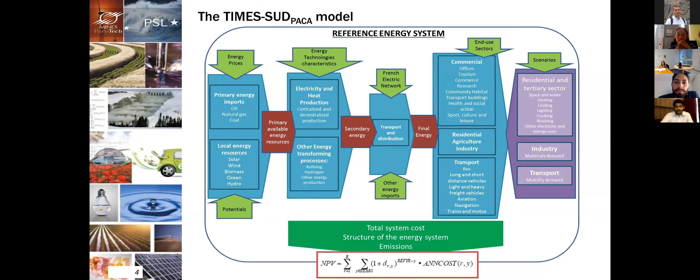And also the different energies that are going to be used during the period, the different transport distribution network, along with the demand side, and how they satisfy the final service energy demands. It's important to remark that in the model there is always an interconnection with the rest of France. So the region can use electricity that comes from France using the electric network and also using the gas network.

So here there is a brief detail of how I have introduced hydrogen to the model. So first, using electrolyzers, they use electricity to produce the hydrogen that, through delivery processes, is going to bring the hydrogen to the demand side. Also, it is possible to store this hydrogen and to blend it to introduce it to the gas network, which will bring gas and hydrogen to the demand side.

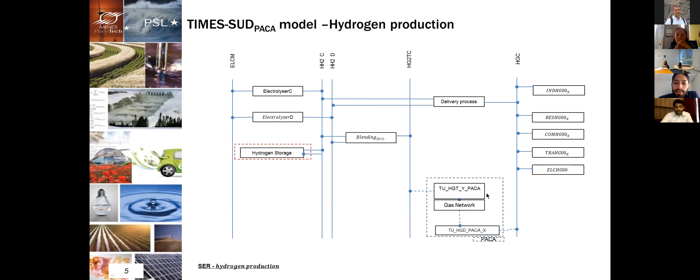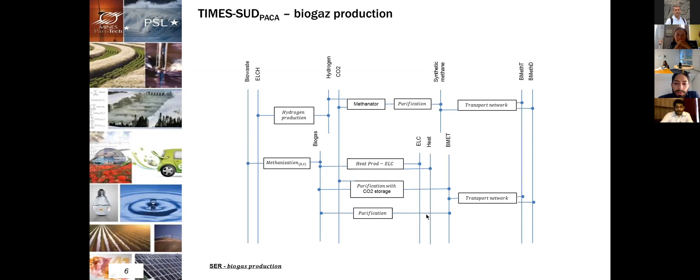Also, another power to gas technology that I have introduced is biogas production using hydrogen, and along with CO2, the methanator can produce synthetic methane that will be introduced into the transport network, and also the classic methanization processes that can produce biogas that can be used directly by heating and electricity-producing technologies, or through purification can be introduced into the gas transport network.

So today's analysis is going to be done through three different scenarios. The first is the reference scenario, where the energy system mainly follows past trends, and there are no new technologies allowed. Then there is the SRADDET scenario. The SRADDET is an official document from the region where they detail mainly the objectives concerned with how to cope with climate change, territorial development, and emission reduction.

So in this document, the region has detailed some of the production that they want to have in the period, especially in 2050. They want to reach a capacity of 65 gigawatts of production, and 75% of this capacity comes from intermittent resources. Okay, so in this document, the region also has targeted a 30% demand reduction. But for today's analysis, the three scenarios are going to follow a demand that follows past trends.

And finally, the third scenario is the new technology scenario, where I allow the model to use power to gas technologies and analyze how they can help the energy transition of the region.

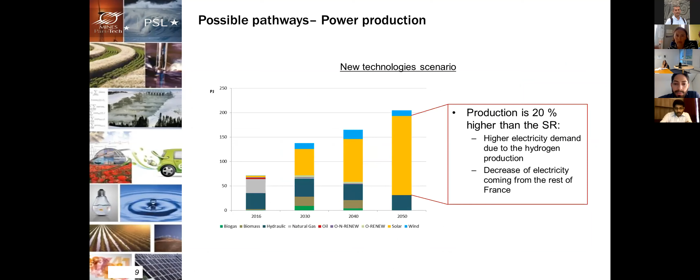So in terms of final energy consumption, we can see that in the three scenarios there is a huge increase in the use of electricity, but there is still also a huge use of fossil fuels. But the scenario that uses the least

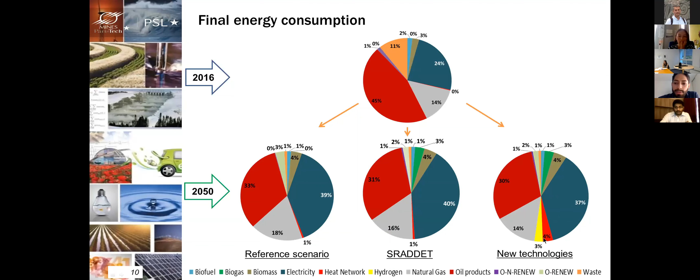fossil fuels is the new technology scenario, where hydrogen has helped to cover some of the steam demand in the industry and also to cover some of the heat demand in the habitat sector. Mainly, hydrogen was used to produce heat transported through the heat network. So in total, there is about 3% penetration of hydrogen in the new technology scenario. So in 2050, there has been a production of 20 petajoules.

68% of this hydrogen was used for habitat heating production, 31% for steam production in the chemical, food and beverage and other industries. And in transport, there was just a little use, 1% of this hydrogen.

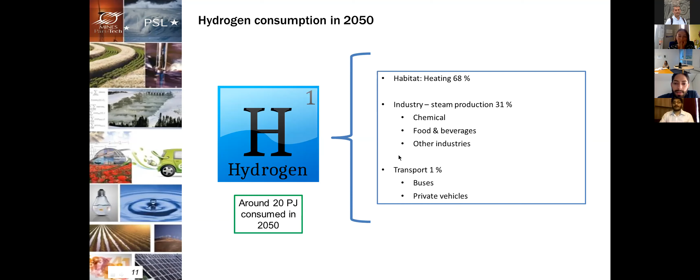The sector has shown to be one of the most difficult to decarbonize, so there are a lot of efforts and other analyses that have to be integrated into this sector.

As a conclusion, we can see that the region is on its path toward the reduction of fossil fuel consumption, as shown in the reference scenario, and also in the increased development of clean technologies. But...

Much effort is still needed, as in the SRADDET scenario, the region didn't reach the objectives established in the SRADDET.

It's interesting to see that power-to-gas technologies can have a key role in the development of clean technologies and can help in the decarbonization of the region, as we can see in the new technology scenario, it helped reduce some of the fossil fuel consumption. But further efforts are needed to apply in the transport sector.

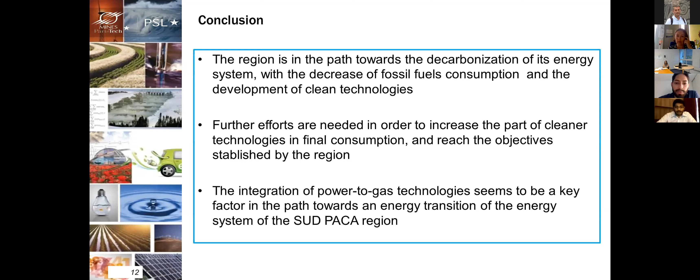Okay, a question from Dijen: how large is your assumed hydrogen mix in the natural gas network, if any?

Yeah, so I'm following the French statement, it's around, I think right now it's stated that 6% of the hydrogen can be introduced into gas networks. So I have to analyze if increasing this amount can change the use of hydrogen. So it's about 6% right now.

Another question: is wind energy not considered for modeling, or is it not selected by the tool? So wind technologies are an option to be developed, but there is not a huge acceptance from the people here in France.

So there is no social acceptance, and also there is a high bureaucratic procedure to allow the installation of these wind resources. That's why there is not much wind production.

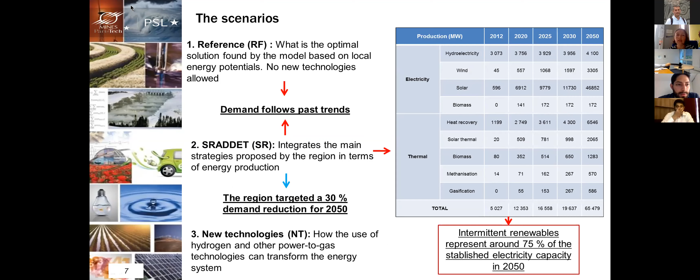It's in the chat. Yeah, I want to see the chat. Can you repeat the question, please?

Yes, did you consider a potential increase in hydrogen demand to produce jet fuels, following the industry strategy for a 50% reduction in CO2 emission in 2050? But I'm not sure if it's just for your...

No, for jet fuel production, no, I didn't consider it. It's just considered for the different sectors, but not for aviation, as I haven't introduced the specific jet fuel production coming from hydrogen.

So in the transport sector, the hydrogen right now is just able to cover some of the demand for buses, private vehicles, and freight transport.

In the future, if I find the technology for navigation and aviation, I will introduce it, and also other technologies that use hydrogen.

Okay, just to verify. No, it's okay. Any other questions? Mm-hmm. Okay.

Can you specify what was the main challenge and difficulties for you to implement the hydrogen in this concept and to enter it into the strategy of the region?

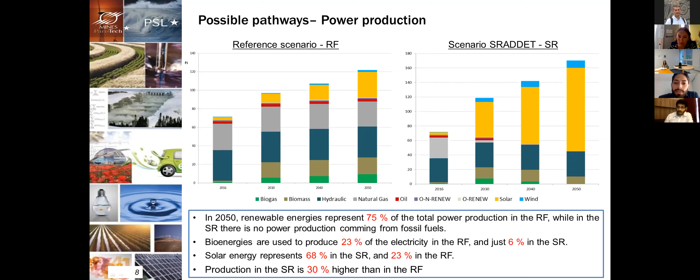So allocating the electricity production from rooftop photovoltaic to hydrogen is one of the hardest things that I have in the model until now.